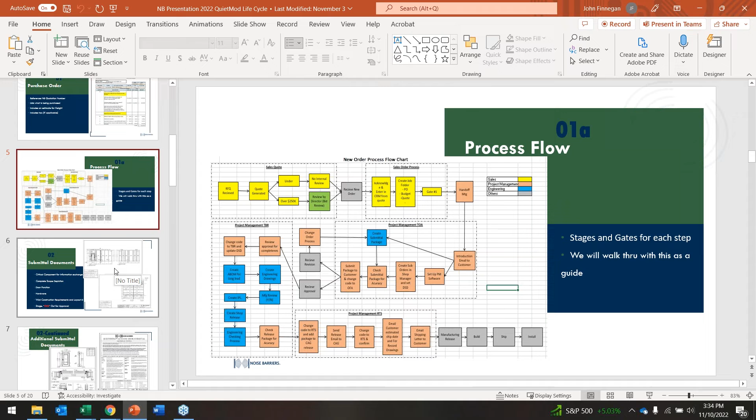This has been part of our presentation for all of these, so I won't dwell on this too much, but it shows the structure of the RFQ through the order, handing off to a project manager, then to a designer, and then we get into the back and forth on our initial submittal and revisions and what can happen to it, the course it takes, and then when it gets handed down through the operation and out through installation. If anybody has any questions, I could get onto that or forward this to you. It's very informative, but it's our process flow—I won't dwell on it again because it's been shown on all 6 of these.

Submittal documents for an enclosure are the most detailed of any of the submittals we do, because we really want to handle all the information for the entire system that you're buying. So it's the complete scope.

Walls, elevations, where the electrical is—you see these conduits that are in the walls here. Doors—I'll show you on the next page; the door even gets more sophisticated on its own. The roof layout for silencers: where's air coming in, where's air going out. The lights, hardware, the wall construction, the panel type. We manufacture about 15 different wall panel types, so this is the opportunity to make sure customer and Noise Barriers are on the same page with what the intended performance is, and that we've selected the wall panel that you wanted and we need for the performance. And it's at this stage when we generate this set of drawings—a typical one, I snippeted 2 here. There could be as many as 10 or 12 in this package.

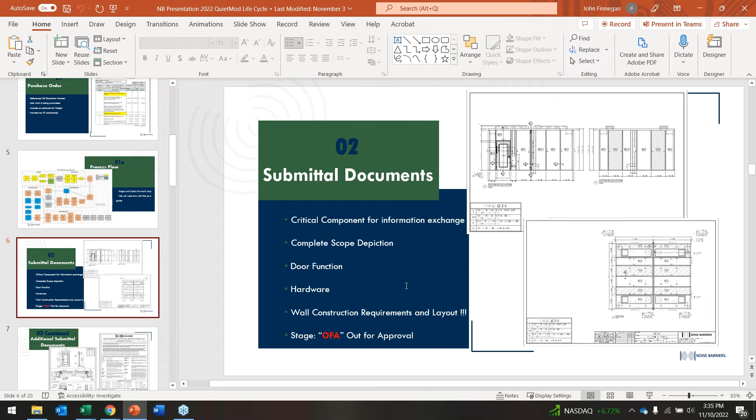We forward it to the customer, and that's when it reaches the stage out for approval, or as we tag it, OFA.

A follow-up to that submittal you just saw, we even get specialized into the door because it's a unique component. So the door will get its own page because of things that could be going on it. This could be an electrified lock set, and we have to show the wiring of that. This could be a light fixture, electrical options, anything that needs a little more focusing in on just elevations like you saw before. But we want to give as much detail as possible so everybody's on the same page.

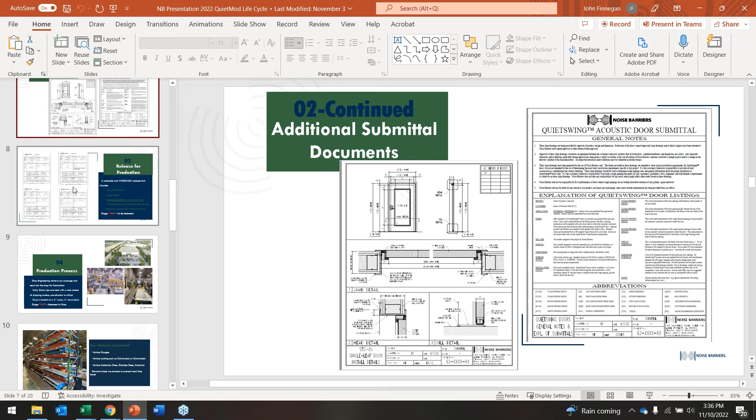Once everybody's agreed on the enclosure layout, it becomes released for production. In our shop, in our terminology, it's called TBR. That's the phase where it will be in our design team's hands. Project management and design team will work on how they want to release this into the shop.

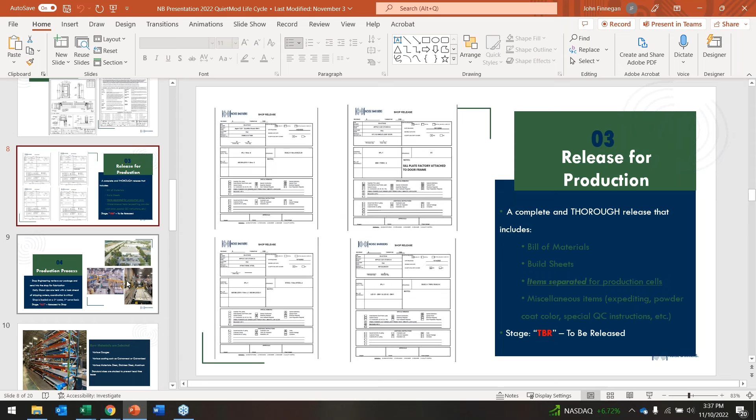So when we put it into the production process, shop engineering reviews our packages and transforms them into the sheets they need for flat layout, cutouts, things like that. And the shop gets loaded on a first come, first served basis. We do quote lead times, as you know, and then we try to keep you up to date, the customer that is, as much as possible throughout the process, because the shop can fill quickly and could impact lead time a week or two. So we try to keep you updated on that, but it is definitely a first come, first serve basis.

So that's why we're regularly on our customer to check on a project that is OFA, out for approval, to try to get it into that approval stage, to get it into the queue as soon as possible. Once we do send it into production, it's called RTS. So if you hear that term when you're calling to talk about our project, it would go into RTS. And again, it's going to go to all these different parts.

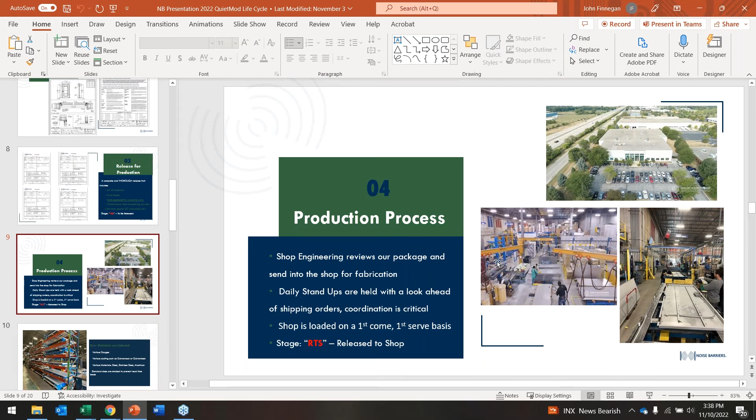Once it's been selected, once the release has been done, every department has their packet. Everybody knows what each department has to build on what date in order to meet again together at the powder coat line. Everybody starts selecting their various raw materials from large volumes of stock.

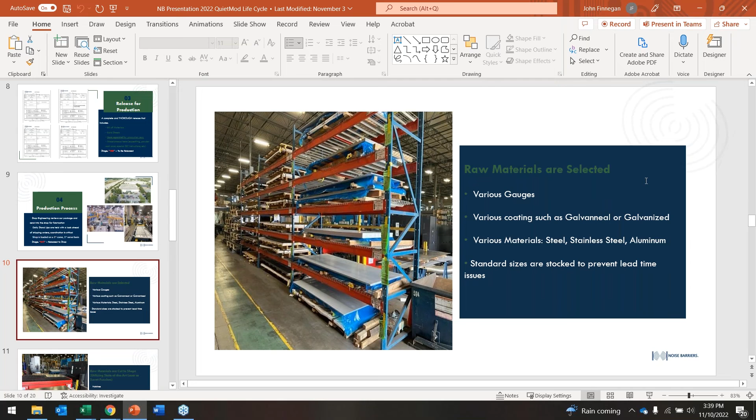It could be ordered to the job if it's special, but we do stock an awful lot of standard weight gauges of steel, particularly for doors and our panels. And then everything gets cut, notched, perforations or penetrations, things for anything that's going to be involved in the enclosure. You saw in the submittal package, there were light fixtures in the ceiling and there were duct cutouts. All of those would be made in these flat sheets right here before the panels are even formed. And then the panels get formed with those pre-cut in them.

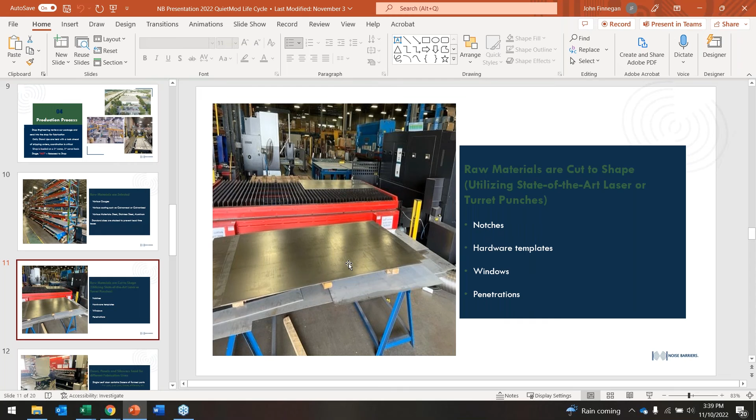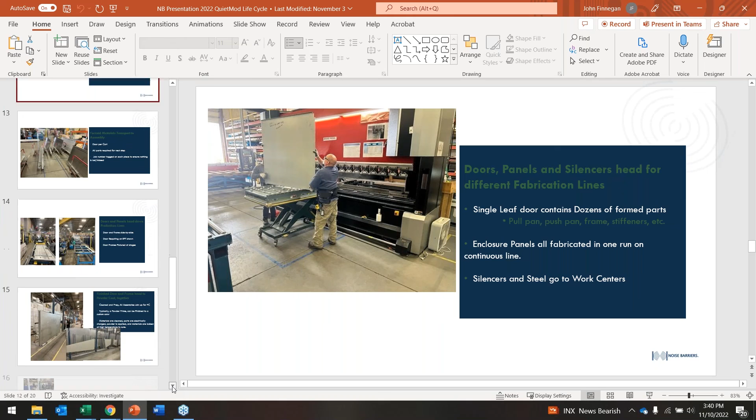So there's no cutting of the panel after the fact. Everything's made precisely to those submittal and layout requirements. Then everything goes down different lines. Doors go down a line, panels go down a line, silencers go down a line, all different. Depending on the capacity of the shop, it's all scheduled to meet. But every single component has a dedicated process so that it's consistently the same quality, same standards.

Here's an example of the doors coming down the door line. Here's the way the material runs from start to finish. Behind us here, if we were physically standing where I took this picture, would be where the flat sheets were notched, cut, and formed. Then they get on work tables and rolling process tables. Each person is doing the same task on a different door or a different panel or a different silencer, each step of the way.

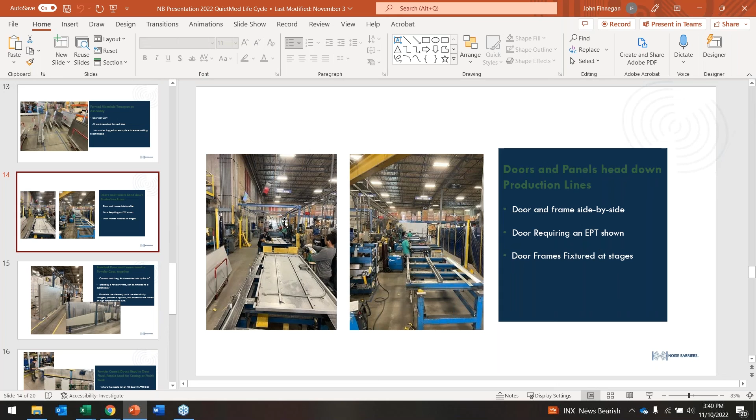Now in the back of this line and the other lines all come together at the powder coat line. Everything gets ideally powder coated at the same time because you have to set up the system with the color. In this case, it's a studio room, the RAL color selected. So we want to hang the door and hang the panels and hang the trim and run that entire job in one shot on whatever color is picked. Typically, doors are powder primed, but since we're doing an enclosure, I gave an example of this. The entire system gets the powder coat.

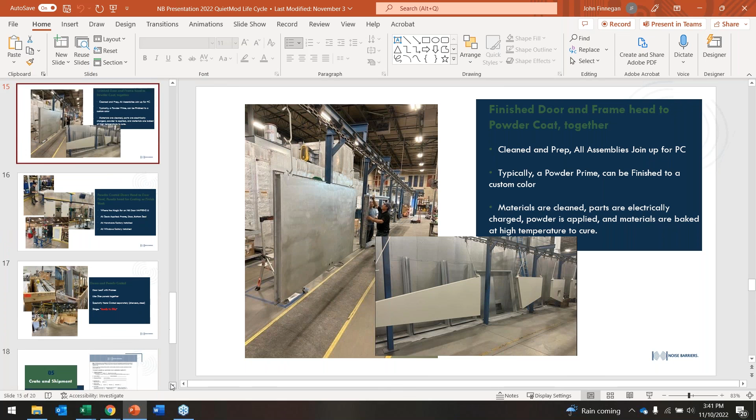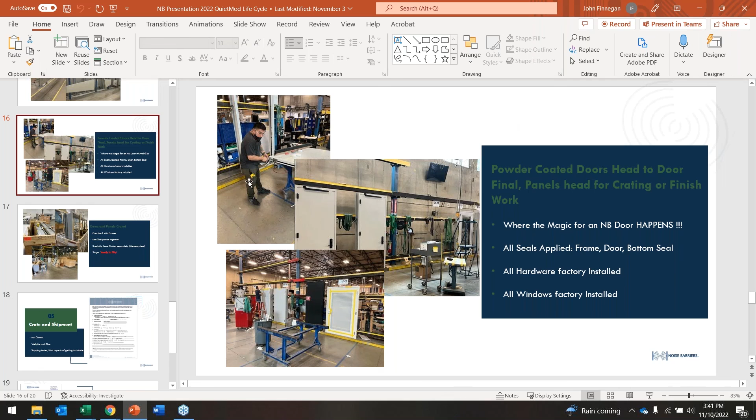They will then be crated and join the panels in the crating department. The 501 building, the second building when I showed the overview, does all the crating now. It's become a major operation for us. They're crating every hour of every single day. Doors get crated on their own and panels get crated together. A typical enclosure like the size we saw approval drawings for would have about 4 to 5 crates, 6 to 8 panels per crate, 1 door or 2 doors per crate.

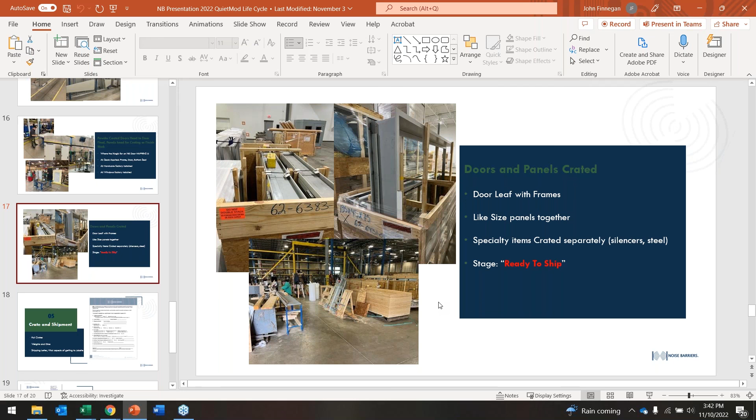Once it's ready to ship, the project management team interfaces with the customer and we ask for a shipping letter to be completed. That ties into the customer to make sure we're on the same page as to where you want it delivered, what kind of truck you want it delivered on, what time of day you would like it delivered. We give weights and dimensions for the crates that they'll be dealing with on the site. This 1-page letter handles all of the issues involved with coordinating delivery from our factory to your job site.

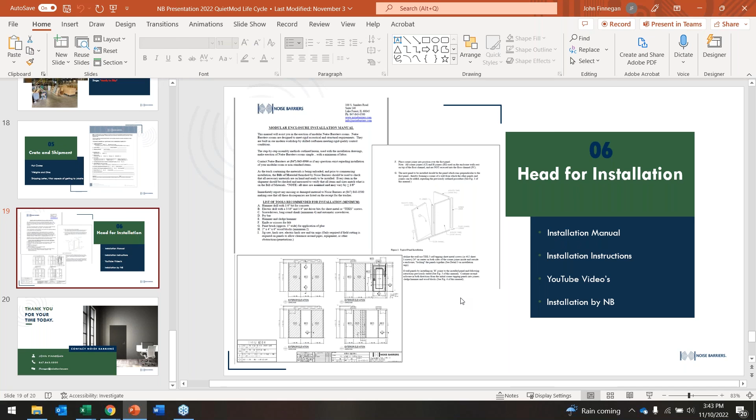And it's that short and that easy. That's it. Give us a call or contact any one of us if you have a question, or contact me if you want to see any more detail on any of this. But I tried to move right along, get you guys in and out of here. That's kind of the life cycle of an enclosure and how we tackle it from our side of the operation. Appreciate it. Thank you.